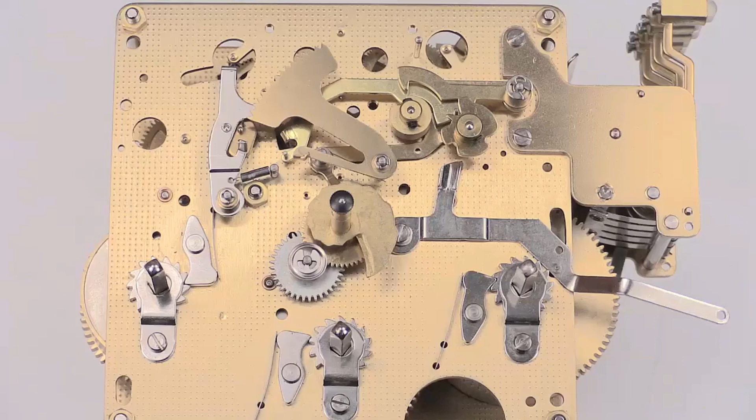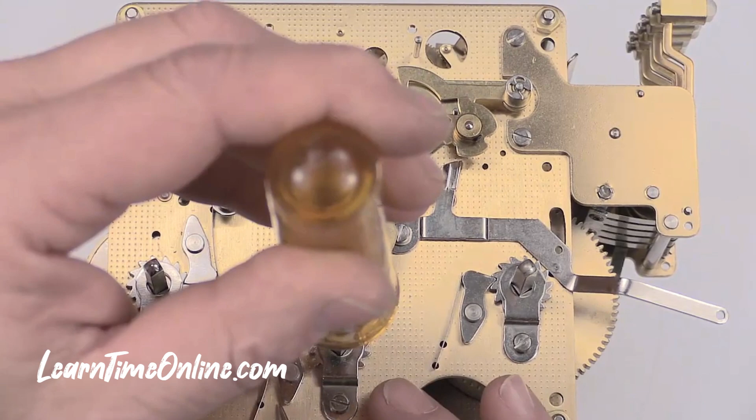Diving a little deeper into the function, I'm going to take off our snail, hour wheel, and our minute wheel and pinion. I'm also going to take off the verge and the crutch piece off the back of the movement. I like to do that as soon as possible when I'm working on these so I don't damage anything by accident. So I want to let down the power on our mainspring and make sure our time train is not going to run when I take this piece off here.

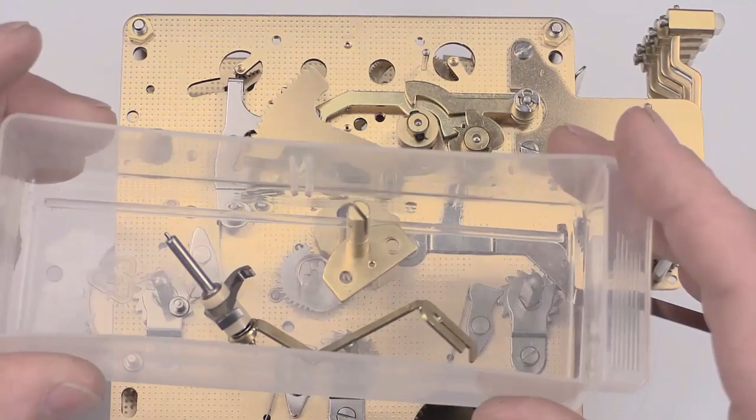Good. That'll allow me to move our center wheel a little easier when I show you this. Now you'll notice when I'm working on things, I'm going to be putting items in little bins. A helpful solution to organizing things as you take a clock movement apart: I like to put each gear train in one bin and all my chime mechanism parts in another bin, and so forth. Helps keep it organized.

Another good thing to do would be, if you're new at this, to take photos as you go. If you're able to do that, put them on your cell phone or smartphone, or maybe make a chart that you can lay these parts out on, that has marks for each part and names. However you decide to do that, until you get familiar with everything, might be a good idea.

So I'm going to take this off here quickly. When I pull the E-clips off, I like to use the small screwdriver. Something I got used to using for taking those off. They do make an E-clip removal tool, which I have never used, but the main goal is to get these E-clips off without marking up anything else, putting scratch marks on stuff,

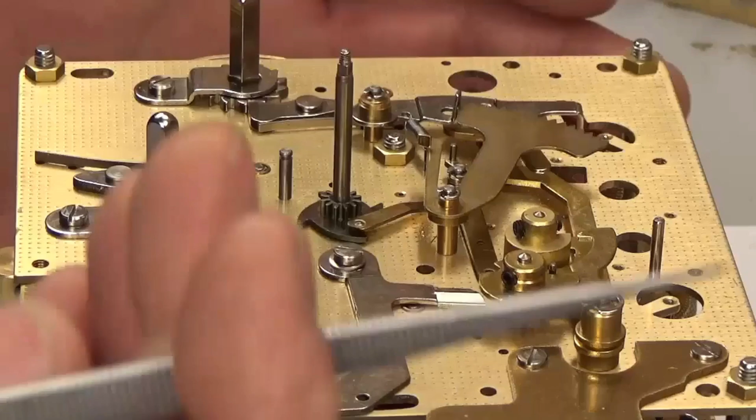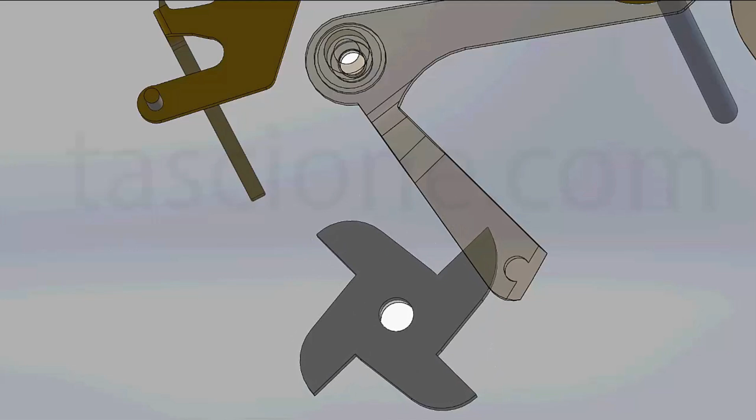Now, this is the center cam. It has 4 lobes. One is going to be longer than the others. Now that longer lobe plays an important function in our auto correction. So you can see I can easily turn this now with our verge off of there.

Okay, now I'm putting the movement into warning and it's going to run. So let's see. I'm going to leave the rack on for now. Let that finish running. Now I can see already that this is out of sequence. Oop, and it continues to run because I've got it tipped funny here. Gravity needs to pull some of them levers down. Okay, I'm going to help our rack back up. Okay, well, we're out of sequence.

So as we were looking at before, as our time advances here on our hands, it turns this center cam. As this center cam turns, it lifts this lifting piece right here. Now this little piece is pivoted up here and comes over to this lever, which has a detent on it, which you can't quite see yet, that lifts our levers. You see when I push on that, it starts to lift our lever. Right here, our chime locking lever.

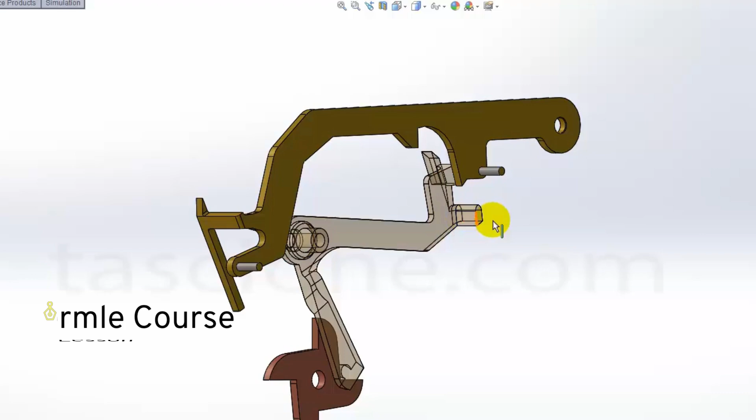This is the detent that William is referring to. Let me swing that out a little so you can see it a little better. And all it is is a tab that reaches out and under the chime locking lever, or long lever as it's sometimes called. And it does the actual lifting of this lever to activate the warn sequence and also the auto correction sequence. Let me bring that back and you can take a look at it working. I've removed the other components just to make it simpler to see.

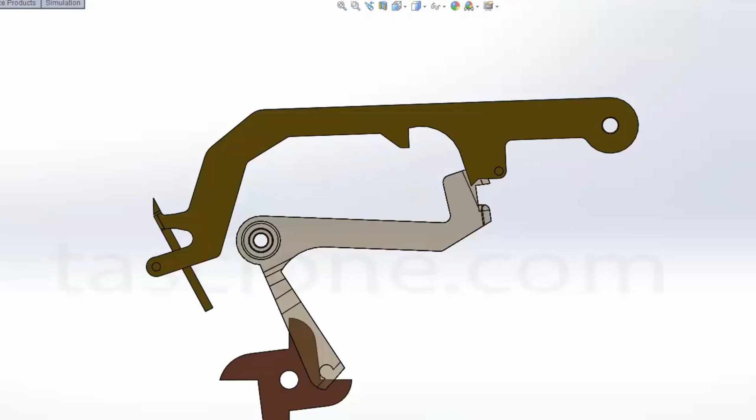So time advances, it starts to lift our lifting piece, lifting lever. Starts to lift our chime locking lever. It gets far enough, we can see all this. Yeah. When it gets far enough, it puts our movement into warning.

Now, noticing our chime locking cam, when it goes into warning, it advances a little bit here so that when these levers are dropped, it won't lock again. It'll ride on the higher part of our cam and allow it to run.

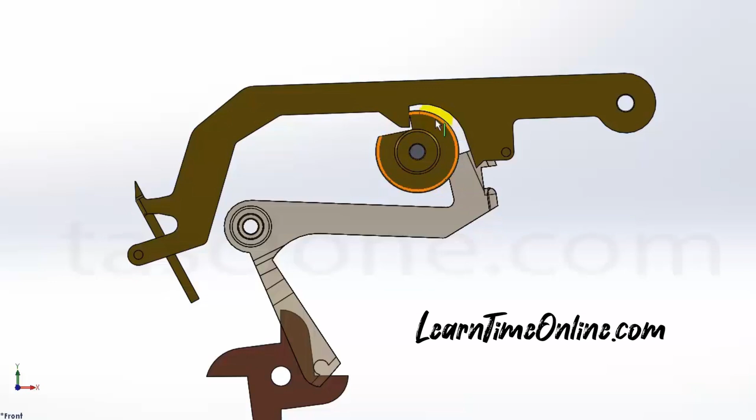Okay, as I scroll this manually in a moment, you'll see the lifting lever ride along the lobe of the center cam. And as the lever lifts the chime locking lever, it will unlock the locking disc. And you'll see the disc move when it goes into warn, about 10 degrees counterclockwise here. And as William explains, that's so that when the locking lever drops back down, it will ride on the top of the locking disc surface.

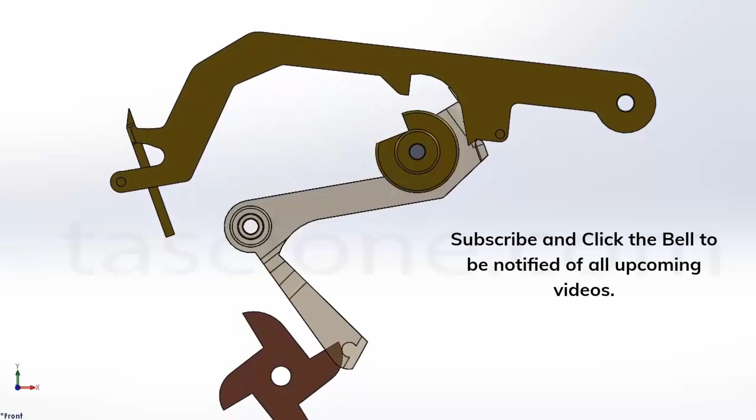Let's take a look at that right now. Okay, you see it riding along. And right there it releases the chime train and allows the locking disc wheel between the plates to turn. And you see it move ahead while it's still on the top of the lobe. It's moved ahead about 10 degrees. Now when it drops off of this lobe, it will allow the long lever or chime locking lever to drop down onto the disc. And then right after that, it can now ride along the surface of that disc for the chime.

We advance in time a little more. It drops the lifting piece, allows our movement to run. Now, as our notch on our control cam, follower pin falls into that notch, okay, when that falls into the notch, it allows the hook on this lever to capture our locking cam.

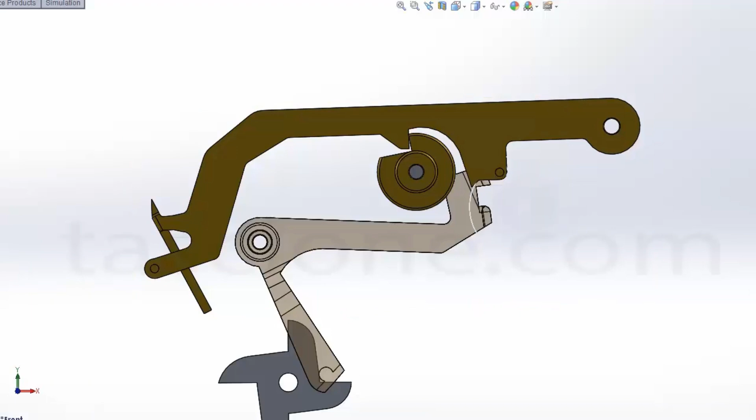To show the locking and unlocking of the chime train, I need to bring the control cam into the scene so that we can now get a different perspective on what William is talking about. This pin follows along the surface of our control cam right here. I'll manually run it through the animation so you can see what's happening here.

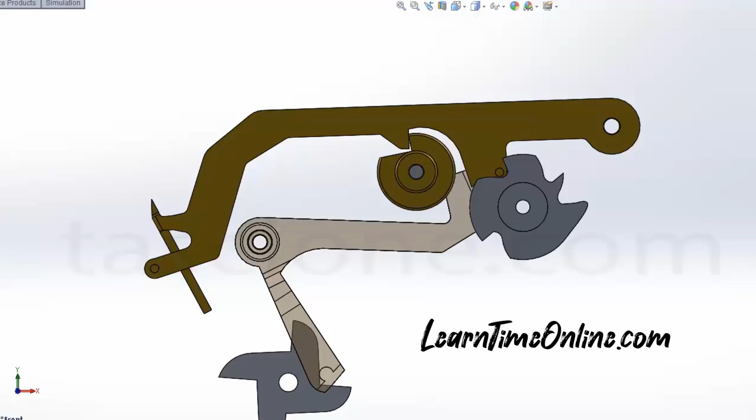You can see as the lifting lever rides along the lobe, it unlocks the chime mechanism right here by releasing the locking disc. And it's going into warn. And the hook can now drop down and ride on the surface of the locking disc. Now note that the pin, the cam follower more or less, is following now along this surface. This is the third quarter. And this is going to keep it from dropping down and locking the locking disc.

But now, the slot that William's talking about, the pin can drop down into the slot. It's now riding on the disc surface, and then it will allow it to drop down into the slot and lock the chime mechanism again. And now it's waiting for the third quarter. Now let's run the animation through the third quarter.

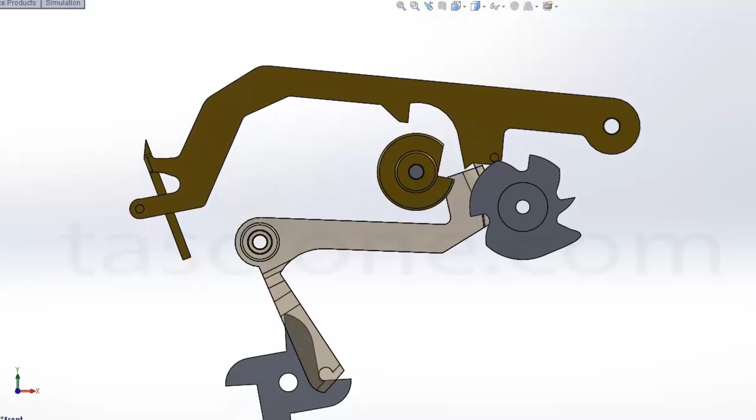Now, what's been shown up to this point will work well for initiating and carrying out the chiming sequence of a clock. That's to say that these components and their interaction with one another that we just covered in the animation is enough to chime all four quarters as well as activate the strike at the hour via the long lever here, which will be explained later. But the important point I want to make here is that this mechanism as it stands is complete in itself and more than sufficient to carry out the chiming in a clock. In fact, similar designs have been used for years for just this purpose. So we could stop here and we would have a chiming clock.

But if for any reason the chime falls out of sequence with the time indicated by the hands, for example, the minute hand points to 45 minutes after the hour, but the clock chimes 30 minutes after, then we'll need to manually bring the chime back into agreement with the actual time indicated by the minute hand. Now, for a clockmaker, that's no big deal. But for the owner of a clock that doesn't understand how this works, well, to use a modern but fitting phrase, that may not be too user-friendly. Who knows what might happen.

So for this very reason, some brilliant clockmaker from our horological past came up with the auto-correcting mechanism and made life a lot easier for many clock owners. So next, William's going to begin introducing and covering the auto-correction components and explaining how they work together to bring a chime that's fallen out of step with the minute hand back into sequence. And I'll jump in with some supporting animations where we feel they'll be helpful.

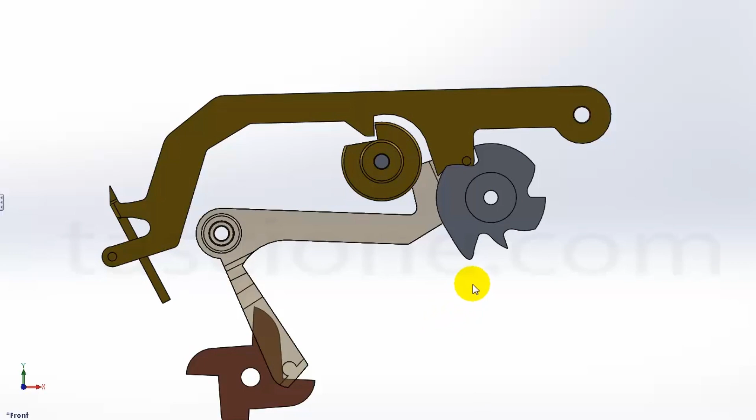Okay. After our third quarter, we've locked our chime locking lever, but we've also dropped our auto correction hook. Now if I pull that up and out of the way, you'll see that it also has this little piece here, which is our auto correction cam follower.

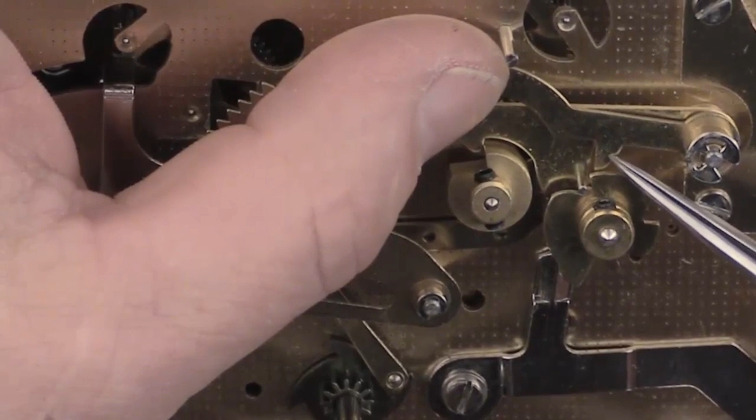Now our auto correction cam follower drops into a lower area on the auto correction cam behind our control cam, and Bob will put up a good animation about what that looks like, how that functions.

Okay, we'll take a look at the auto correction cam that William just referred to, which is mounted on the back side of this control cam, and then I'll explain its role in conjunction with the other components involved in the entire auto correcting process. Now we'll gradually build the animation by bringing in one auto correction component at a time and cover the purpose of each part in the assembly.

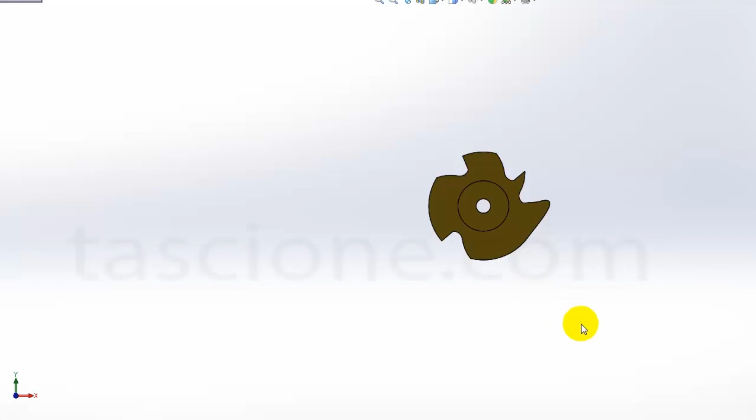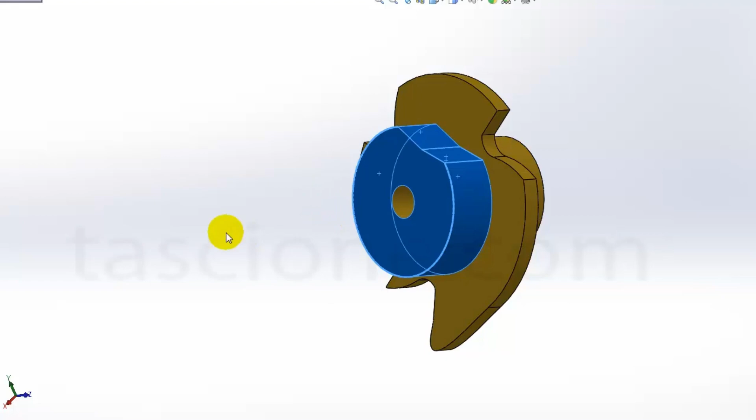And then William will finish this section up by taking us through a real-time video demonstration of the complete auto correction system in action. Let's spin the control cam around and take a look at the auto correction cam now. This is it right here, and as you can see, it's firmly fastened to the back of the control cam. We'll understand the purpose of this cutout in a moment.

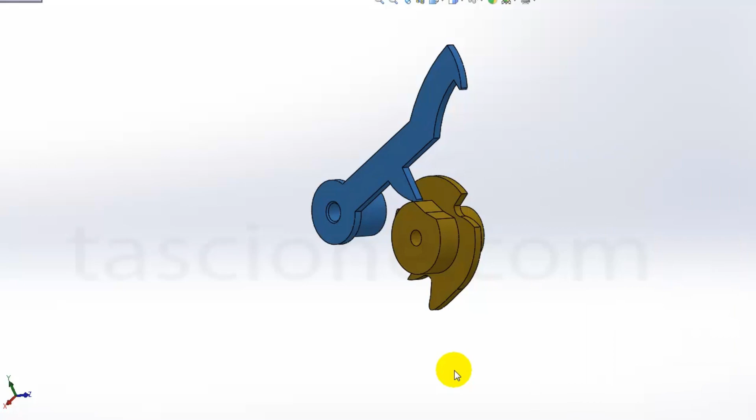Now we can bring the auto correction hook into the scene. We see how the correction hook is kept from falling by means of its cam follower riding along the surface of the auto correction cam here. As the entire control cam assembly turns, I'm going to turn it back to its original position and make the control cam transparent so we can observe how these two components interact and function.

We can see here that the correction hook cam follower rides along the auto correction cam surface for most of the auto correction cam's rotation. The auto correction hook maintains an even level for most of its travel until it finally arrives at and can drop down into the cutout right here.

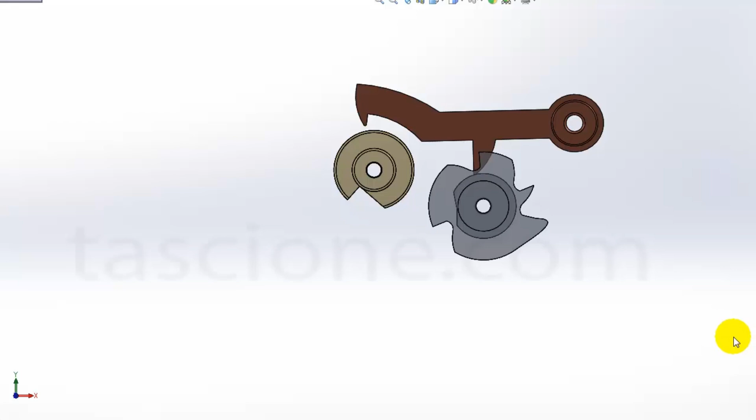Now let's see the role the hook plays by bringing in the locking disc. Okay, I'm going to run the animation backwards a bit so we can work with it. That should do it right about there. Again, we'll see this cam follower riding along the surface of the correction cam, which will hold the correction hook up and in place, maintaining a small distance between the hook and the locking disc right here.

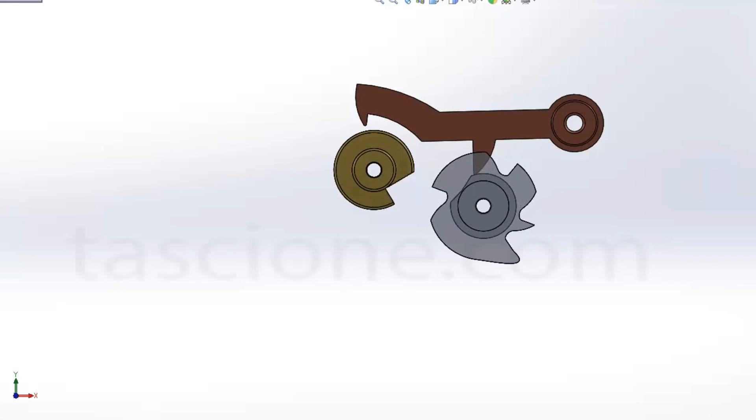Advancing, we still maintain this relationship between the two components until, as we saw earlier, the cam follower begins to move down into the lower portion of the correction cam here, permitting the correction hook to drop onto and ride along the locking disc surface, until the hook end of the correction hook drops down and into the path of the locking face on the disc, locking the entire chime train again.

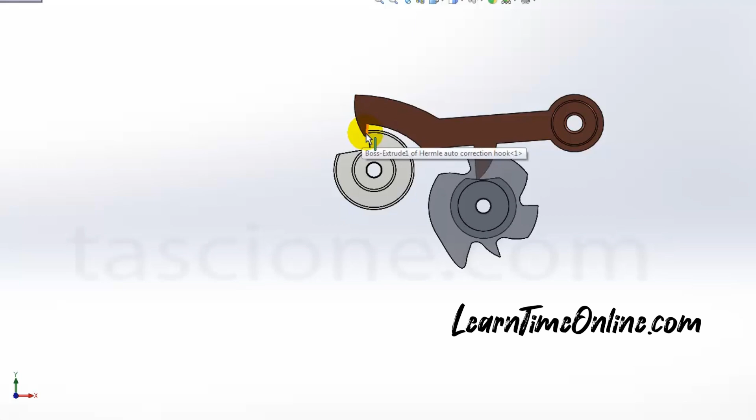It's easy to see now that the timing between all of these components is critical. If the timing is even a tiny bit off, it may be enough for the chime to mess up. Setting up the chiming mechanism will be covered in detail in the assembly section later, but without a clear understanding of how these components interact with one another, timing would more or less be a guessing game.

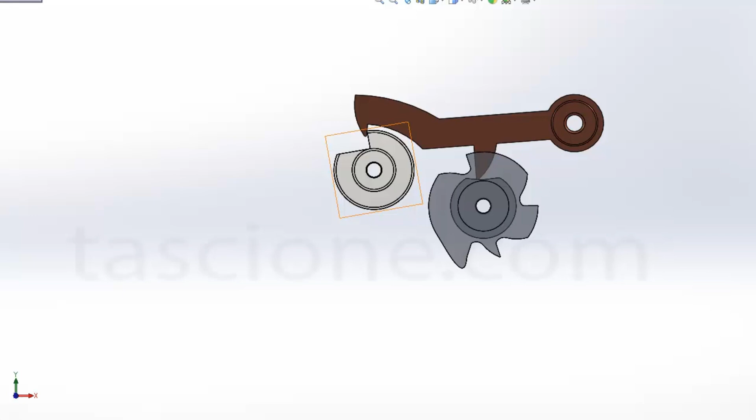So we've advanced just a little bit. So that is dropped in there. We need to now lift the auto correction hook up and out of the way. Now, William is beginning to explain how the auto correction function is activated and how it can only be activated by the long lobe on the center cam.

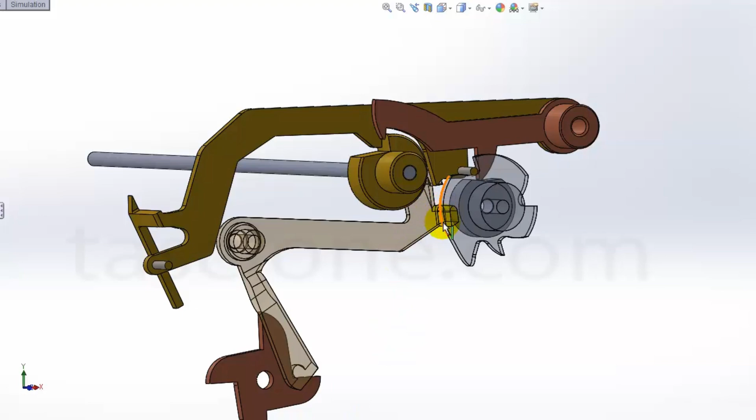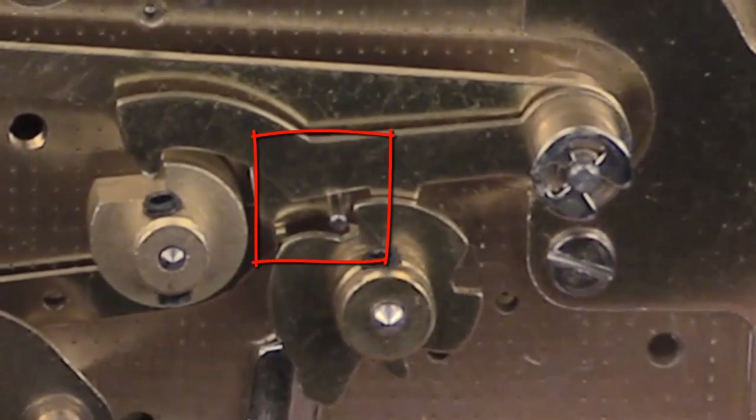Now, you remember that this control cam follower pin rides along the profile of the control cam, but it also serves another important purpose, and that is it acts as the lifting pin for raising the correction hook up to unlock the locking disc. Now let's take a look. If I advance over one of these shorter lobes, okay, we can see it lifting our chime locking lever. But it hasn't lifted our auto correction hook. Okay? And that'll happen on all of these three other lobes.

Now that it's going to go higher, it's started to lift that hook. It's lifted the hook far enough to release the locking disc and put the movement into warning. Now that it's in warning, as soon as it drops off our long lobe, the movement will be allowed to function. Okay.